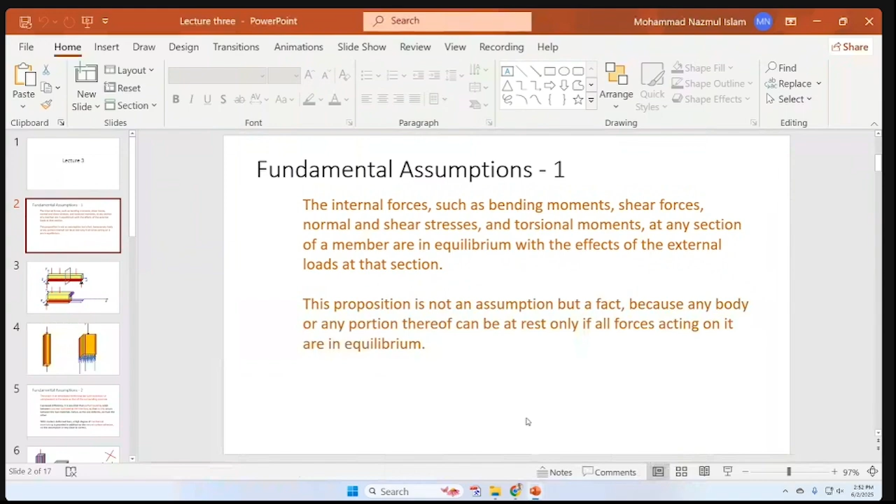Just a second, I think I need to open one more file. I don't find the file, so let's continue with this one. Okay, we have 5 assumptions. I'll spend like 5 to 10 minutes on each of them.

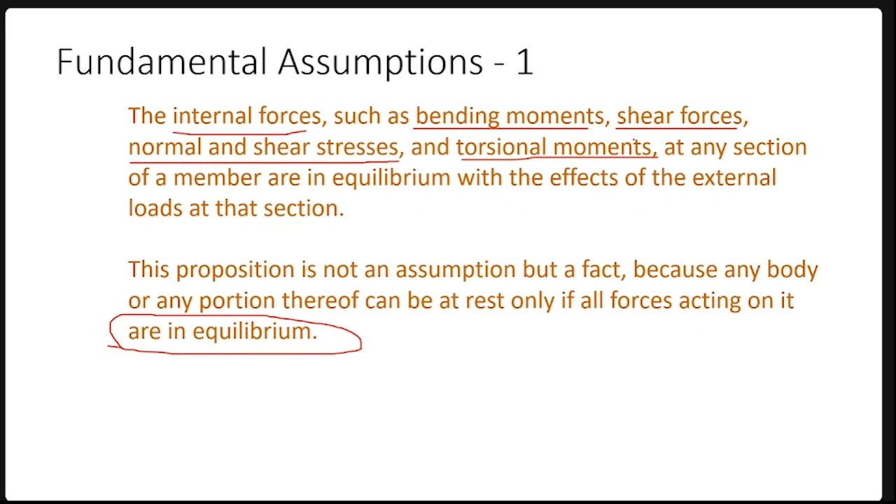So assumption number 1 is about equilibrium. We assume that the internal forces are bending moment, shear force, normal and shear stresses, torsional moments. These things are created at sections. If you cut a reinforced concrete member by taking an imaginary section, you will see the internal forces: bending moment, shear force, stresses, maybe torsional moments, and so on. So those things are in equilibrium with the external loads. Basically, internal forces and external forces make an equilibrium for any part of a reinforced concrete structural member.

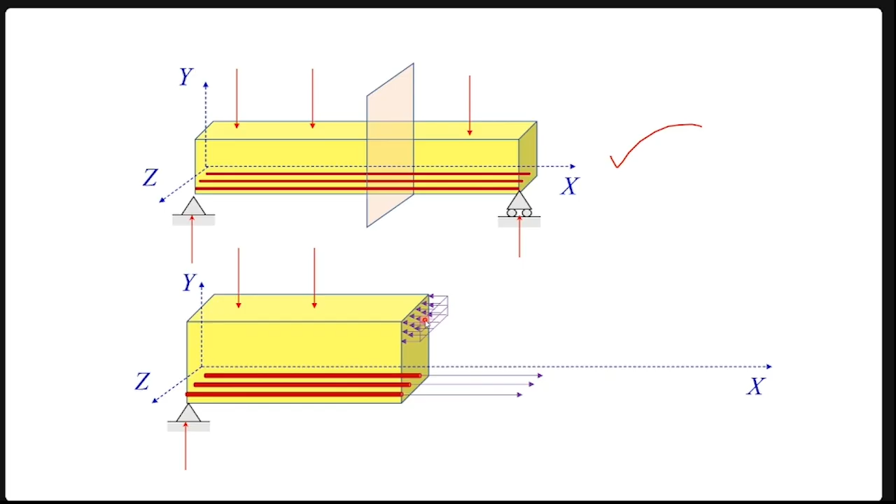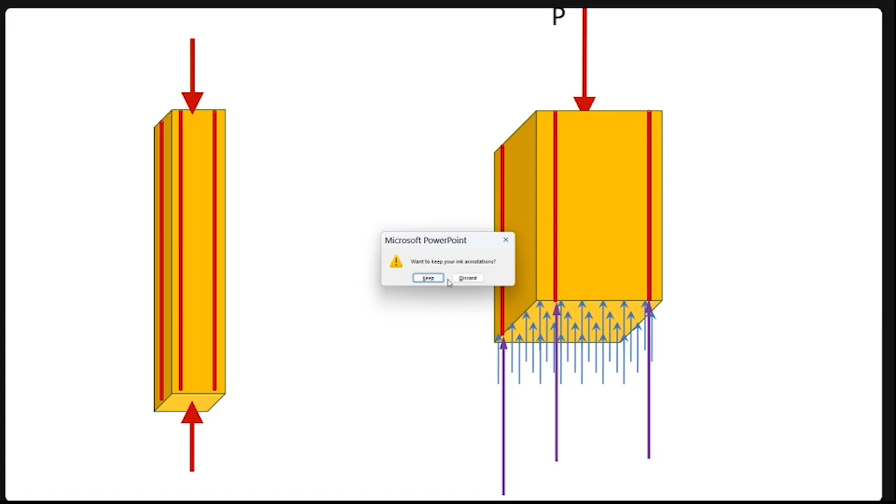So the example you looked at was about a beam. I showed the external forces acting in the beam - the red colored forces - and I also showed the internal stresses for the beam, which are in equilibrium. If you consider a column, for example, we have cut the column somewhere in the middle, and we are looking at the top part of the column. Here the external force is this applied force from the top, and we have internal forces since it has been cut somewhere here.

So say we cut it here into two pieces, and we look at the top part only. This surface is an internal plane surface.

So in this surface, we'll probably have compressive stresses.

Of course, there are two materials here. We need to remember always that reinforced concrete is a composite material. Composite means there are two materials blended here.

One material is inserted into another. It is basically concrete, but we have steel bars inserted into concrete.

So it's a composite, and a composite will behave in different ways than a homogeneous material. Homogeneous material is when there is no inclusion, nothing. It has the same material everywhere in all three dimensions, the same density everywhere, the same unit weight everywhere, the same property everywhere. That sort of material is called a homogeneous material.

But here we are not dealing with a homogeneous material. We have a composite. Composite means we have concrete, but at some locations we have steel bars inside concrete.

So with a composite, some stresses will be in concrete - I put them in blue color - and some stresses will be in steel bars, which I draw in purple color.

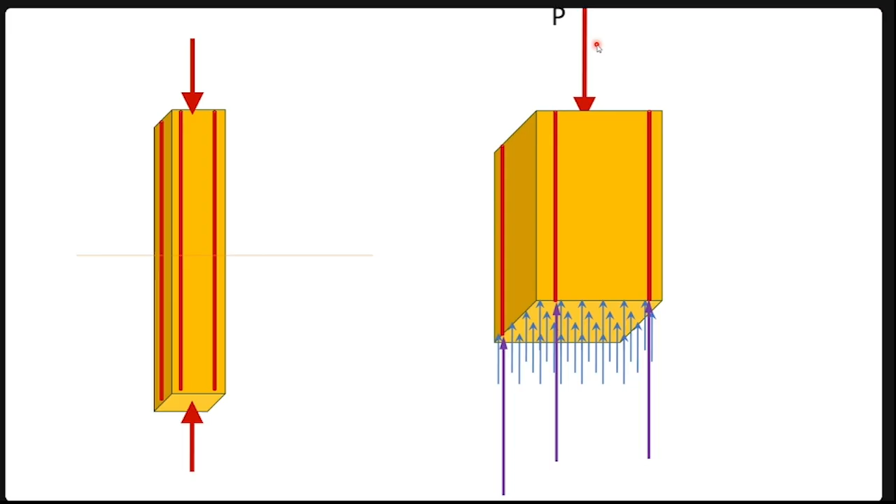So whatever is the structural member, it could be a column or it could be a beam. If you draw all the external forces, and if you assume the internal stresses correctly, the equilibrium will be there between the external forces and the internal stresses.

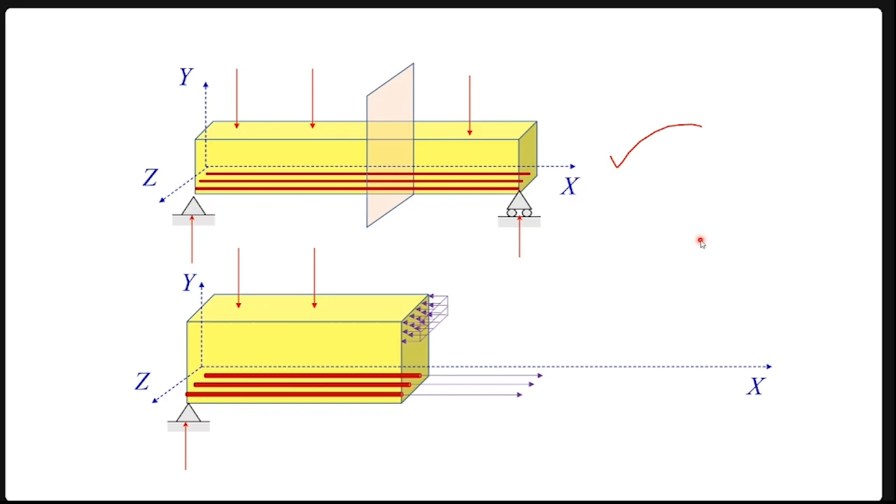That's our fundamental assumption number 1. If you understand this one, I will move on to fundamental assumption number 2.

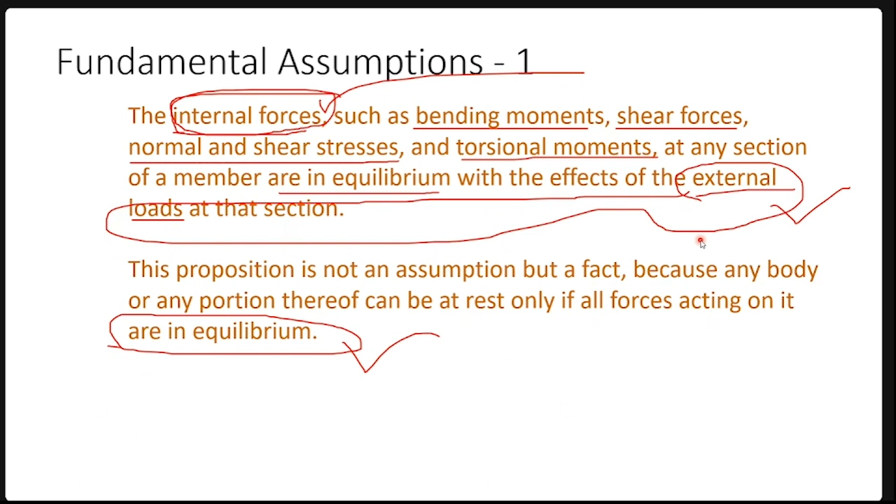Okay, so let us proceed to fundamental assumption number 2. This is about deformation. The first one was about equilibrium. The second one is about deformation.

Deformation means - I think we could have written it in a very simple sentence. Let me go back and write it down in a very simple sentence.

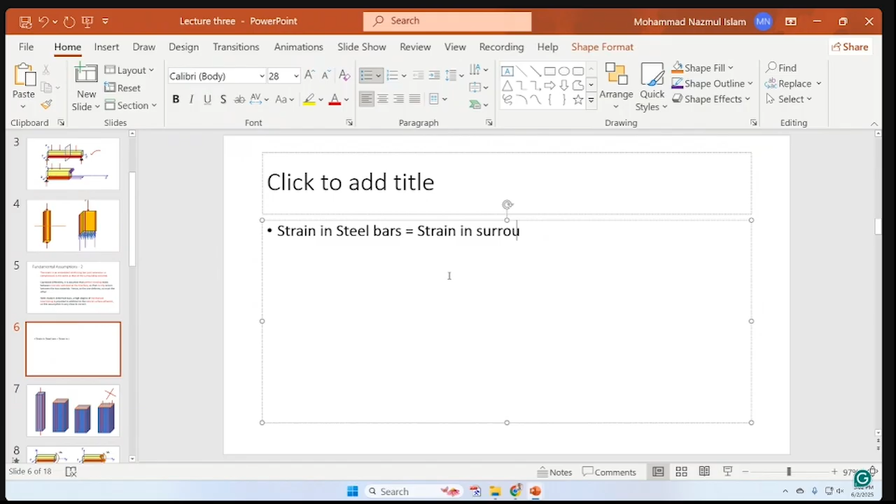It means strain in steel bars is equal to strain in surrounding concrete. So basically, strain in steel equals strain in concrete.

It's a very simple concept, but this concept has the most profound implications in our reinforced concrete behavior and design.

We assume, and this is reality - we assume that strain in steel bars, or strain in steel, is equal to strain in surrounding concrete.

So let me give you a few illustrations by figures first, then I'll come back to the statement one more time. So look at this column carefully.

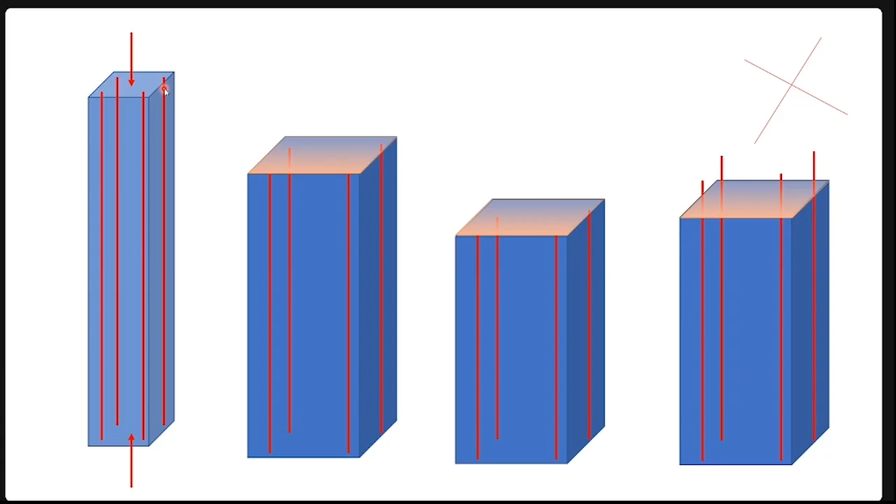To the leftmost, we have a column that has 4 reinforcing bars inside it. In its interior, there are 4 bars. So the column is acted on by a compressive force. So what we expect is...

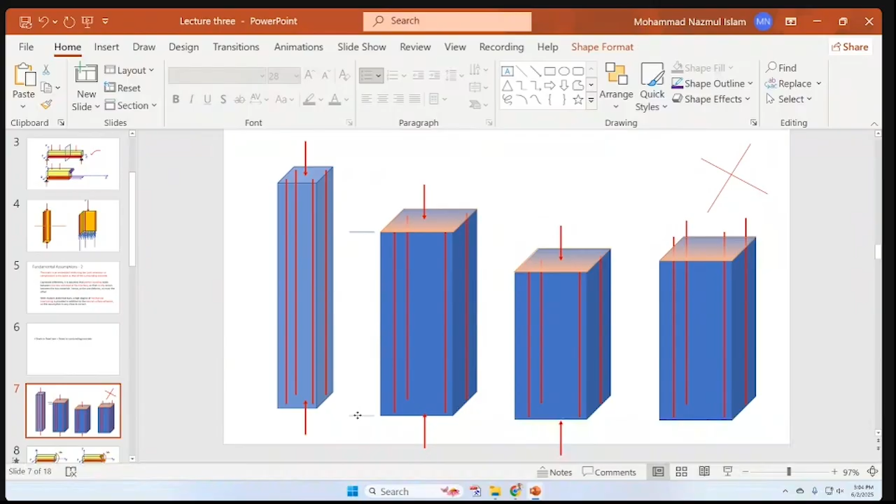due to the application of the compressive force, the column will elastically deform. Basically what we assume is, if the length of the column before deformation was L - so let us consider that the length of the column before deformation was L.

So after deformation, since it is under compression, under compressive force, the length of the column will be a little bit smaller. Let us consider this smaller length to be L minus delta.

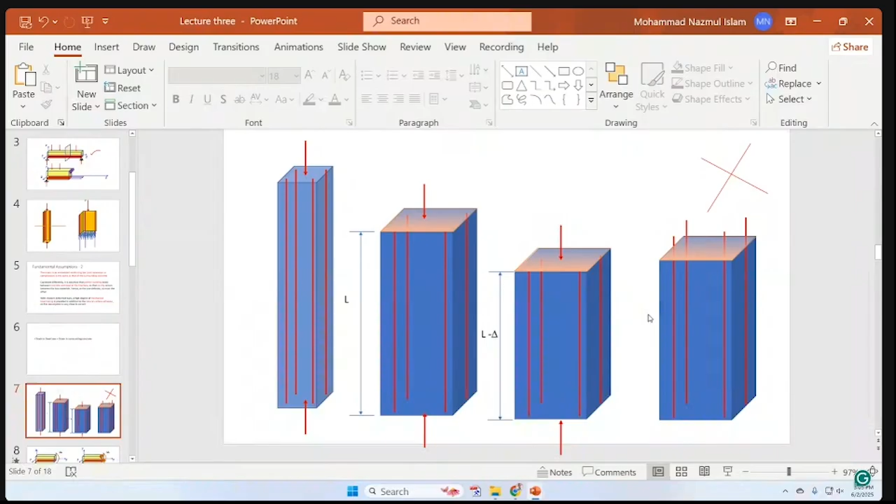Now look at the third figure. Before deformation, the length of the column was L, and after deformation, the length of the column is L minus delta. Delta is its elastic shortening.

Elastically, there will be shortening. These sorts of shortenings are very small, maybe 1 or 2 millimeters, but it is there - 1, 2, 3 millimeters based on the magnitude of the applied load.

So what we assume here is that the shortening, the amount of shortening delta, is equal for concrete and steel. So if concrete is shortened by an amount delta, all steel bars also have been shortened by the same amount of delta.

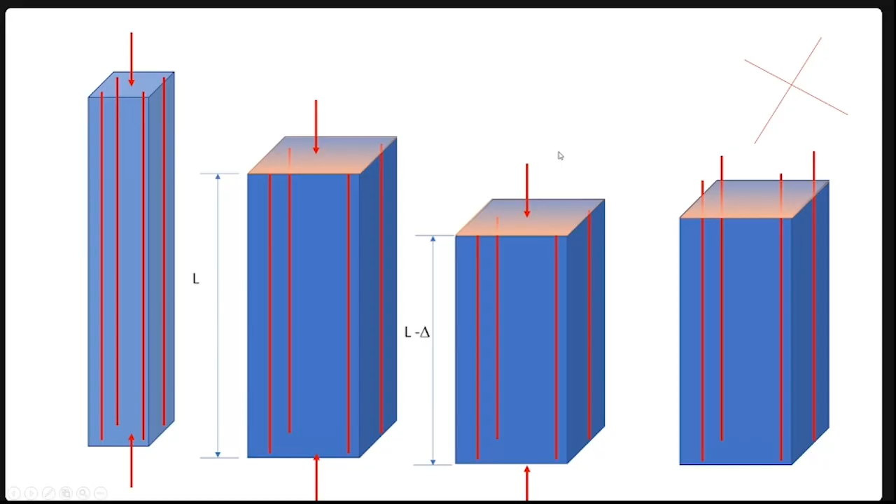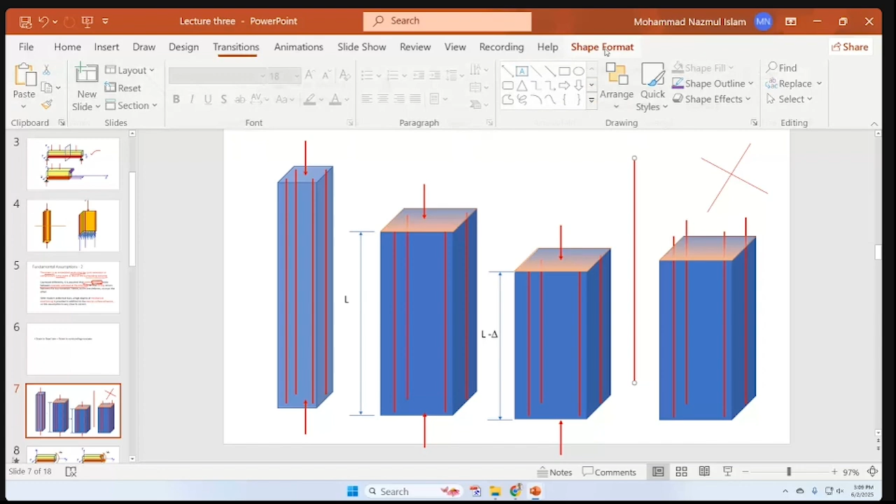This is basically a frictional force that exists between concrete and steel at the interface. Interface means, let me draw it for you. What does interface mean? Let me make it thicker. So there will be a bond force.

If there is a tendency of deformation, this sort of friction between steel and concrete is generated, and that friction stops any sort of relative movement between concrete and steel. So this strong bond stress is basically friction created on the outer surface of the cylindrical shape of the steel bars.

This kind of friction is created on the surrounding cylindrical surface of the steel bar. That friction stops any sort of relative movement between steel and concrete. This relative movement, in our engineering terminology, is called slip.

So if there is a slip, meaning if there is a relative movement - for example, in the fourth figure, which has been crossed out by me, there was a slip. To properly understand this fourth figure, you should consider something. Hypothetically, imagine here there are 4 steel bars embedded in a foam-like material, like the foam in a sofa set - imagine a column of foam with 4 steel bars embedded inside it.

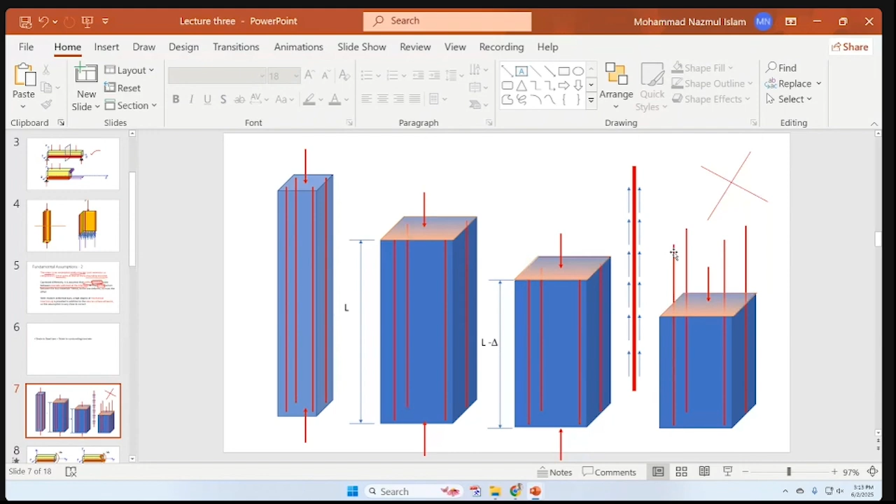Concrete and steel deform equally. There is no relative movement between steel and concrete - that relative movement we call slip, S-L-I-P. So there is no slip between steel and concrete. As one deforms, so must the other. If concrete deforms, steel also deforms; if steel deforms, concrete also deforms. They cannot deform separately, they deform together - they elongate together, they contract together.

So extension or compression, elongation or contraction, happens together. There is no relative movement between steel and concrete.

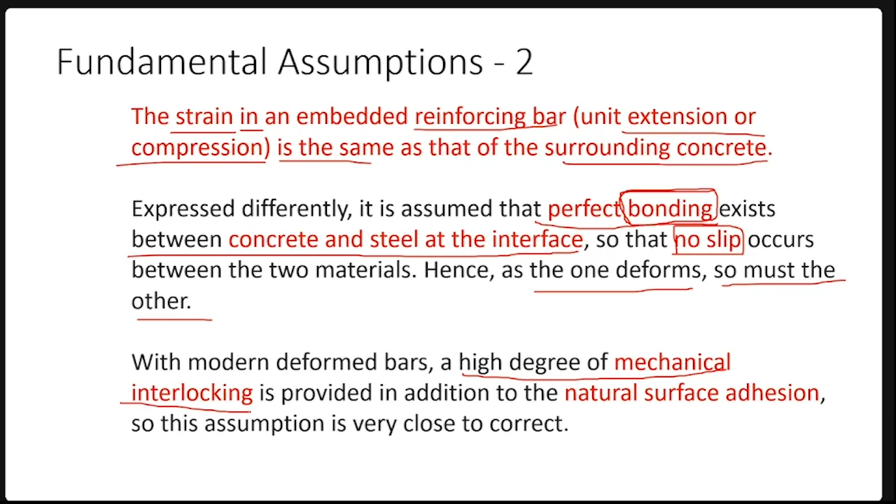This is maintained by a high degree of mechanical interlocking, because the bar surfaces are ribbed - deformed surfaces, we call them deformed bars. Their deformed ribs are interlocked with the aggregates of concrete, and they don't allow any relative movement, in addition to the natural adhesion between cement and steel. So this is very close to the correct situation.

So for a column, we assume it this way: the fourth thing doesn't happen. The third thing happens - concrete and steel have equal shortening or equal elongation.

If you consider a beam under bending moment, this is what we assume to take place in a beam. When you take a cross section, consider that this is the cross-sectional left part of a beam, created by taking a section somewhere here. So this plane surface is an internal plane, and there is a bending moment. Maybe there is a shear force and axial force, but we are not considering them right now - we are considering only the bending moment.

By the way, are you listening? Yes sir, yes sir, yes sir. Very good. We have 53 or 54 students at this moment.

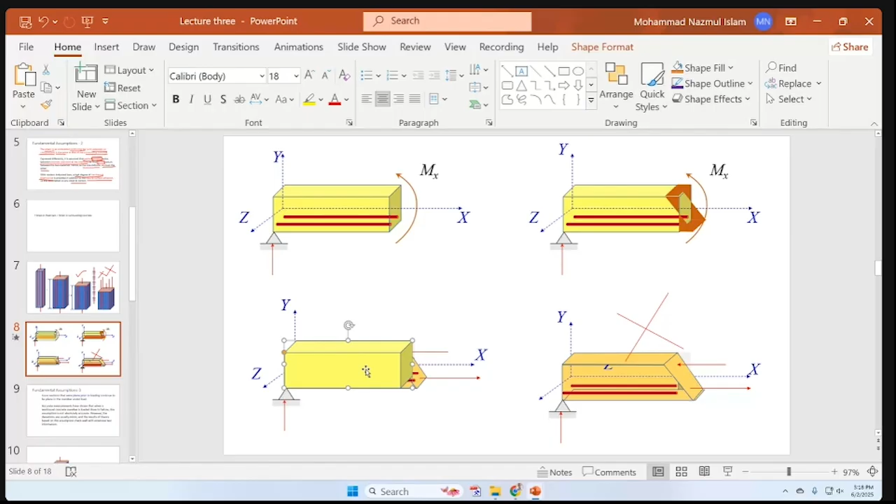The vertical surface was the situation before the bending moment was applied, and after the bending moment is applied, the vertical surface has been rotated and gone to this inclined surface. So if the surface is rotated, you should understand that the top portion, from this 0 point upward, this whole top portion of the beam is acted by compressive strains, and the bottom portion is acted by tensile strains.

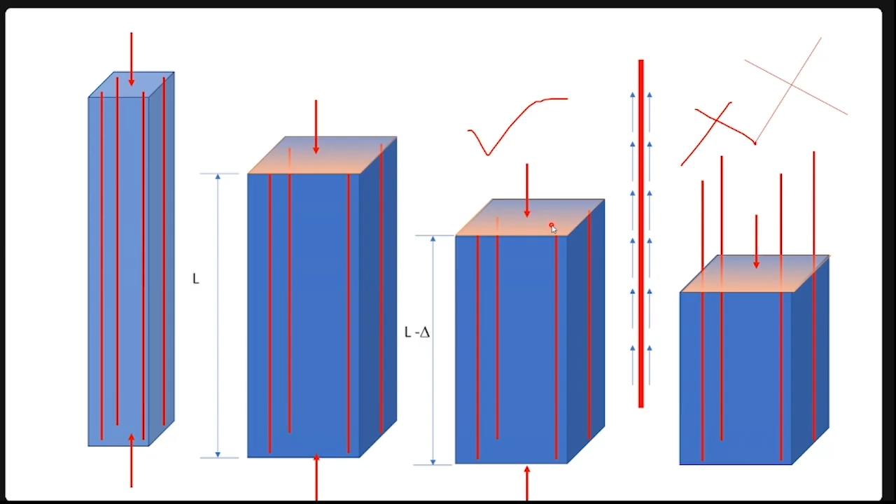And the fourth scenario doesn't happen - where concrete shortens a lot but steel bars don't shorten, or shorten less, causing unequal shortening. That doesn't happen. The deformation will be equal between concrete and steel. This happens for compression, and it also happens for tension when concrete is acted on by bending moment. So due to bending moment, when a vertical cross-sectional surface undergoes rotation like this, some portions of the concrete are compressed due to compression, and some portions of the concrete are elongated due to tension.

We are focusing on the tension zone only. In the tension zone, concrete is elongated, so it must take the steel bars with it. Steel bars will also elongate by the same amount. So this fourth figure doesn't happen, where concrete has elongated but steel bars maintain the same length. The amount of elongation in concrete and in the steel bars at the same location will remain the same. That is what we mean that strain in steel bars equals the strain of its surrounding concrete. So that's our assumption number 2.

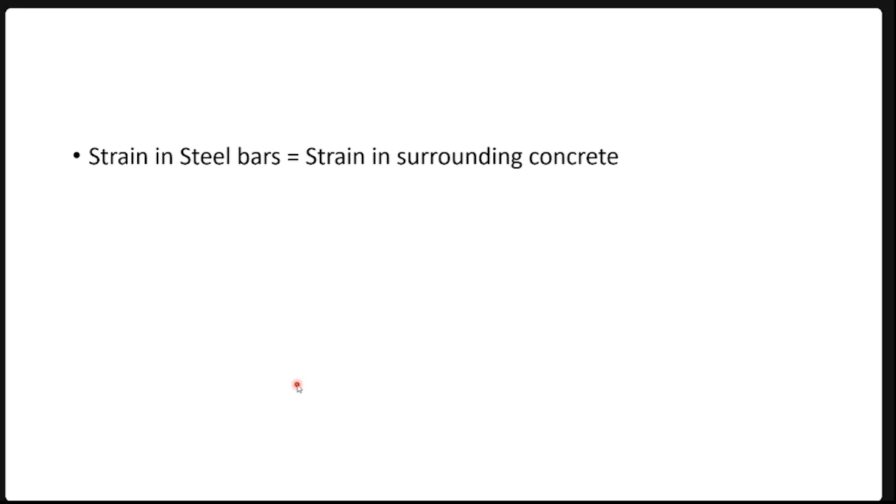You try to understand it.

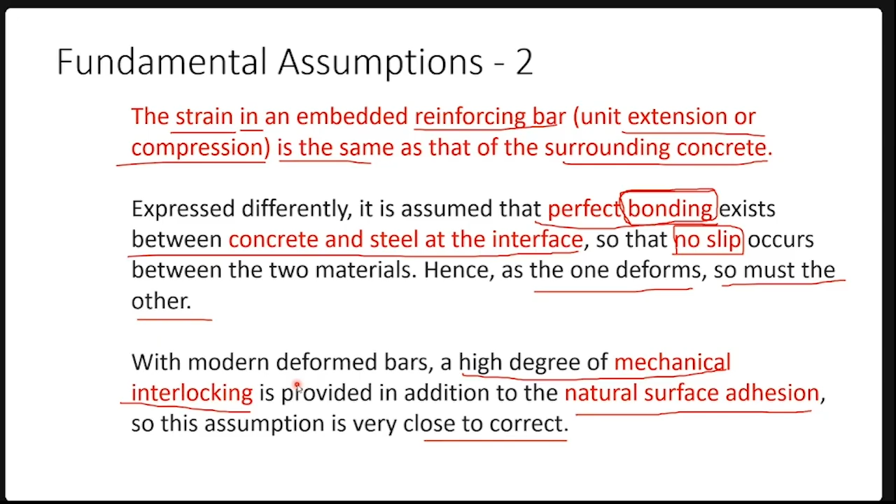Now we'll move on to assumption number 3. Assumption number 3 is something that we already have gone through.

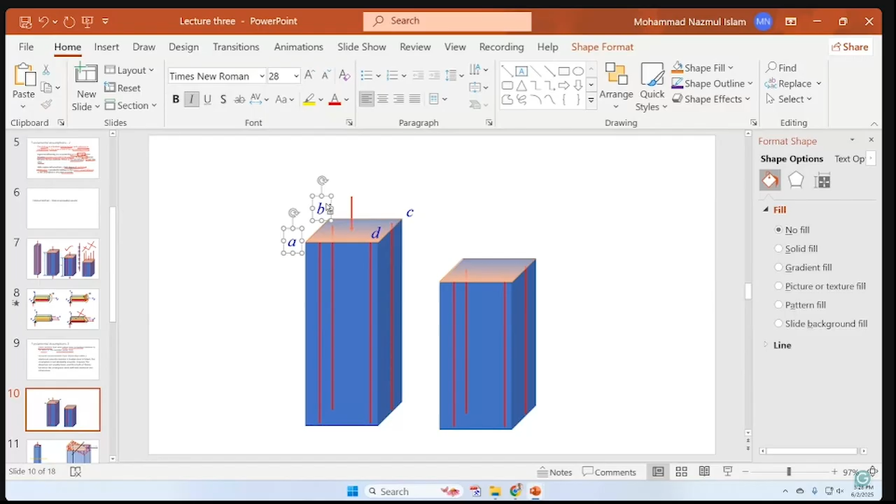So we are focusing on the cross-sectional surface ABCD at this moment. After deformation, the surface ABCD goes to a new location, the whole thing compresses, but it remains a plane surface. It remains a rectangle. The surface doesn't change.

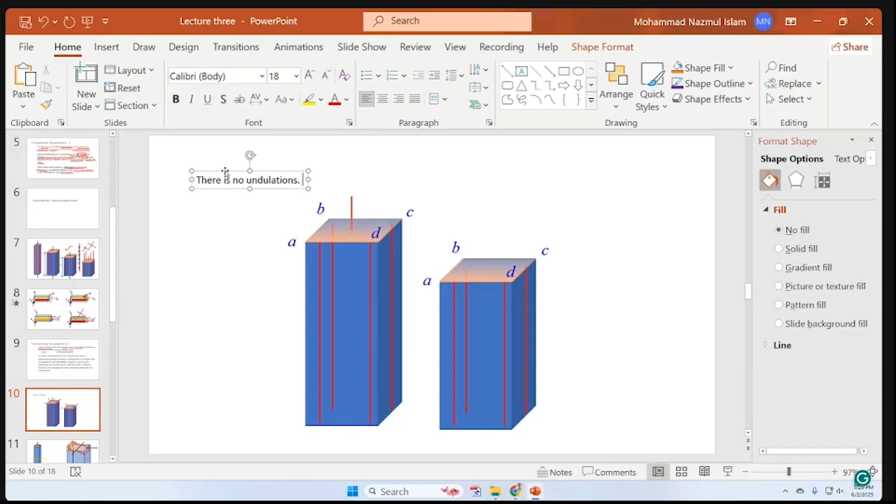Their surface remaining plane also means there is no undulation. No undulation means no warping.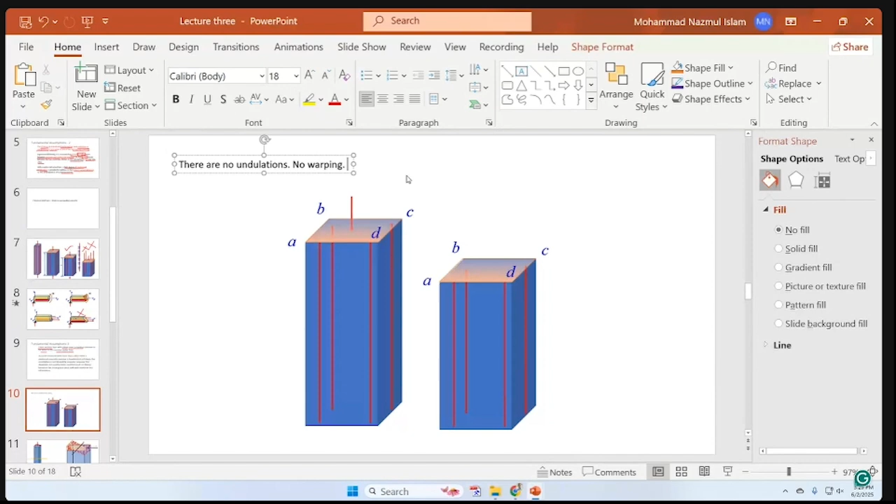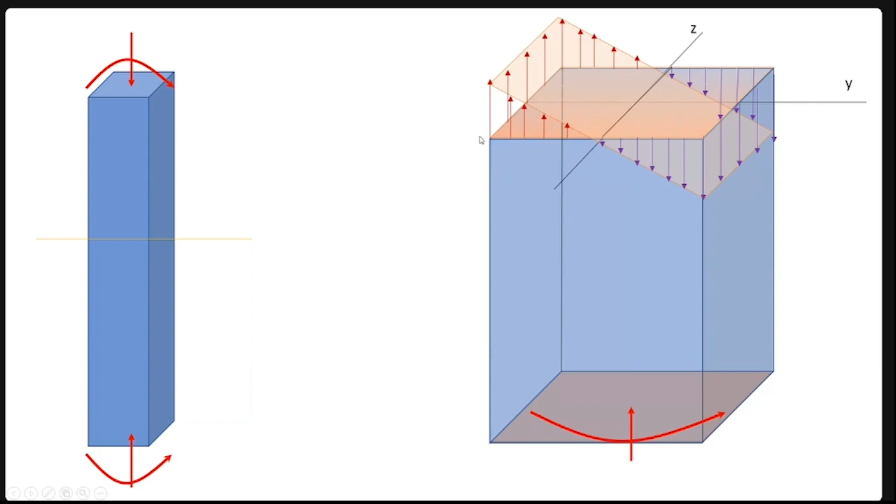So this happens to column, it also happens to beam. Even if you apply a bending moment to a column, in the last figure we applied only a concentrated force. If you apply a bending moment, the surface ABCD undergoes a rotation.

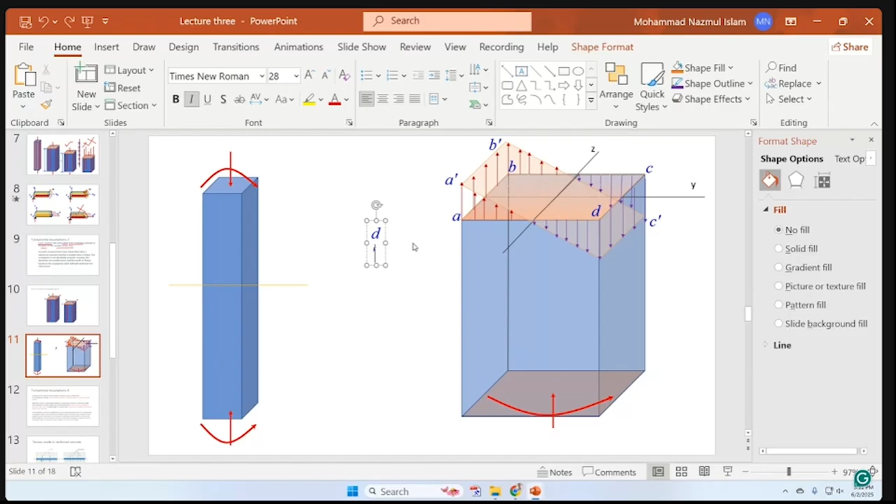But again, this inclined surface is also a plane surface. Again, there will be no undulations, no warping, no aperture.

Although this is not absolutely correct, there are some sort of warpings and some apertures, but we ignore them when we design reinforced concrete structures. When the rectangle ABCD undergoes a rotation and goes to a new orientation,

A prime, B prime, C prime, D prime.

And you understand, as I told before, that... I'm just on the phone for a moment.

So what I was saying is that this assumption is not 100% correct. If you measure accurately, studies have shown that when a reinforced concrete member is loaded close to failure, this assumption is not absolutely accurate.

However, the deviations are usually minor, and the results of theory based on these assumptions check well with extensive test information.

I want to emphasize this particular term, test. We need to understand that concrete more or less does not follow any mathematical formula. Most of the time, concrete does not follow any mathematical formula. So to understand concrete's real behavior properly, we need to go to the laboratory and do some tests.

So we have found that very close to failure, this assumption is not 100% correct, but the deviations are minor.

And the results check well with the extensive test results.

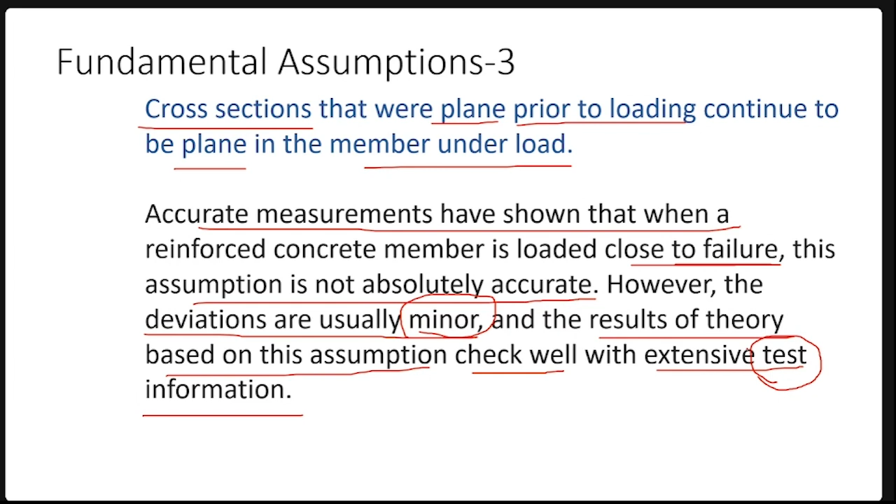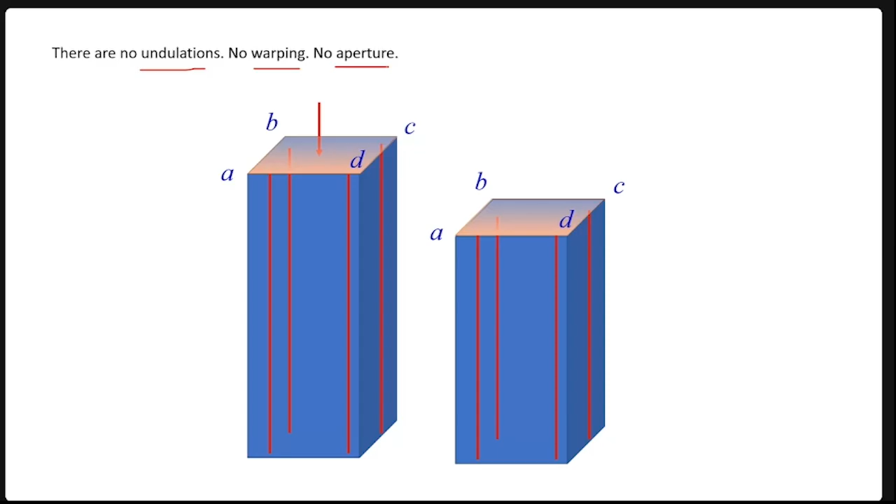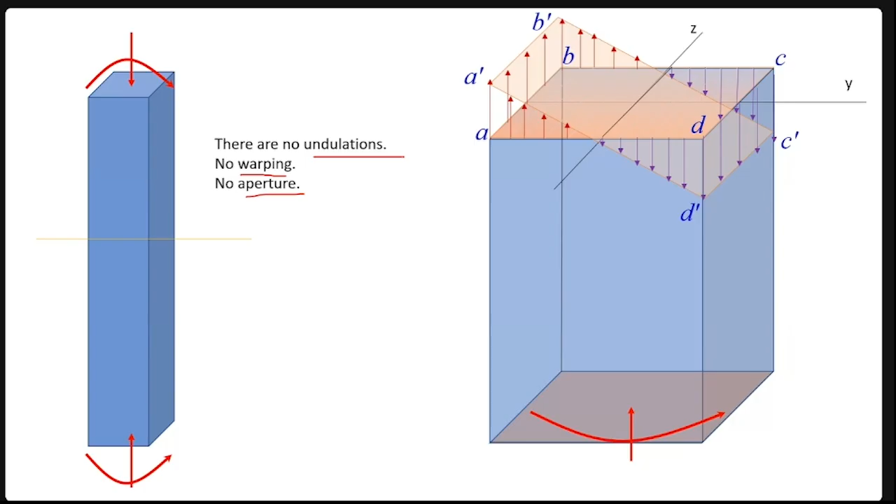What we are assuming here is that all the cross sections, for example for the column, we have a rectangular cross section ABCD. It is compressed, but ABCD remains ABCD. There is no undulation, no warping, no aperture. It remains absolutely plane. Similarly, when a column or beam undergoes a rotation due to bending moment, the cross-sectional surface ABCD rotates to a new orientation, A prime, B prime, C prime, D prime, but the surface still remains a rectangle, although inclined. It is plane, with no warping, no aperture, no undulation. It is absolutely plane. This is our assumption number 3.

Now assumption number 4. This is pretty simple, although I wrote a lot of information here, but the assumption itself is simple. As you understand from the beam behavior, let me go back and show the beam behavior here.

So when a beam is acted on by a bending moment, the cross section undergoes a rotation. Whether it's a beam or a column, the cross section will rotate. So when it rotates, you understand that some part of the beam is being pushed inward.

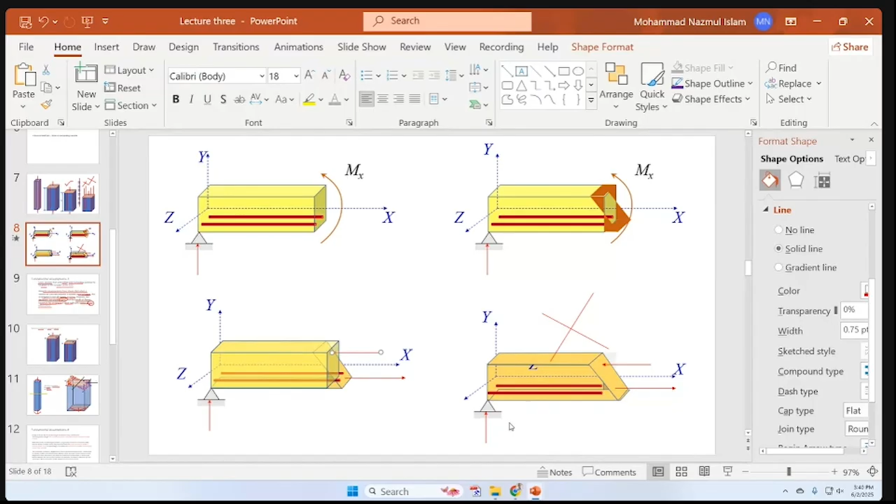I showed a force here. Some part of the beam is pushed inward, and when someone pushes a material inward, we call it compression. So some portions of the beam are under compression, and some other portions are being pushed outward, which creates tension. There are two forces, compression and tension, acting in parallel toward opposite directions. They create a couple, and the couple moment is equal to the applied bending moment Mx.

That is one side of the discussion. Here we are concentrating again on the tension zone. We need to understand that concrete is very strong in compression. In the compression zone, whatever the force is, concrete can take a very large value of force. Concrete is strong in compression. It doesn't break down, collapse, fail, or crush easily under compression. But when you apply a tension force to concrete, you need to understand that concrete is weak in tension.

So when you apply a tension force, concrete cannot take that much tension. Concrete fails under a very small amount of tension force. When it fails under a very small amount of tension force, we see this sort of cracks. This crack is visible, right? Crack, crack, crack, all crack. So these cracks are numerous, like so many cracks.

So concrete on the tension side is always cracked. Usually these cracks are very small in size. We call them micro cracks or hairline cracks. Hair means hair, hairline cracks, cracks as thin as a hair's line. But these cracks are everywhere. All the concrete structures you use, your concrete buildings, bridges, flyovers, elevated expressways, whatever, all concrete structures are cracked.

So cracks are everywhere. Concrete is designed to crack. We expect cracks in concrete. If concrete is not cracked, it is not a good design. So we will assume that concrete on the tension side is always cracked.

So here we wrote that the tensile strength of concrete is only a small fraction of the compressive strength. So concrete in that part, meaning the tension part of a member, is usually cracked. Basically the tension zone is cracked. In well-designed members, these cracks are generally so narrow as to be hardly visible, so we don't see them because of painting and everything. They are hairline cracks, very narrow in dimensions.

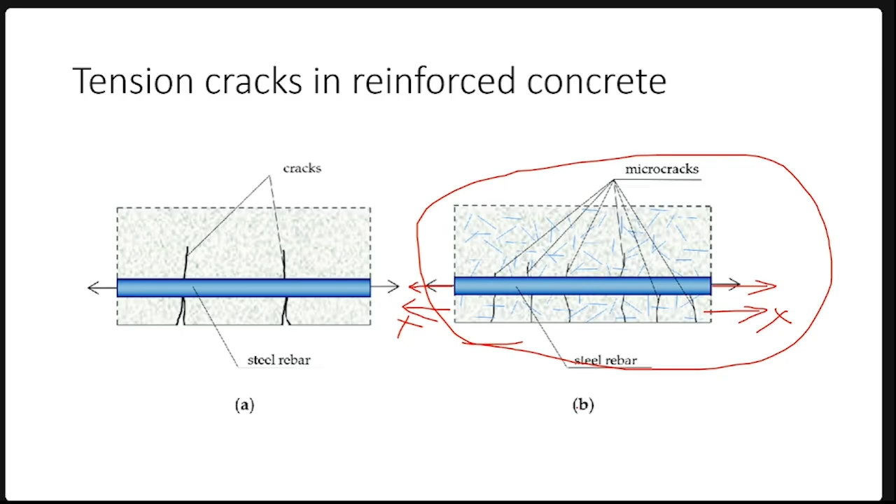So if there are cracks, we need to understand that if concrete is cracked everywhere, concrete basically is not carrying any tension force. All the tension force is being carried by steel bars. So concrete does not carry any tension force when it is cracked; all tension forces are carried by steel bars. So when we design a reinforced concrete member, we design the tension zone to be resisted by steel bars only. Concrete does not resist any tension force. This is our assumption number 4.

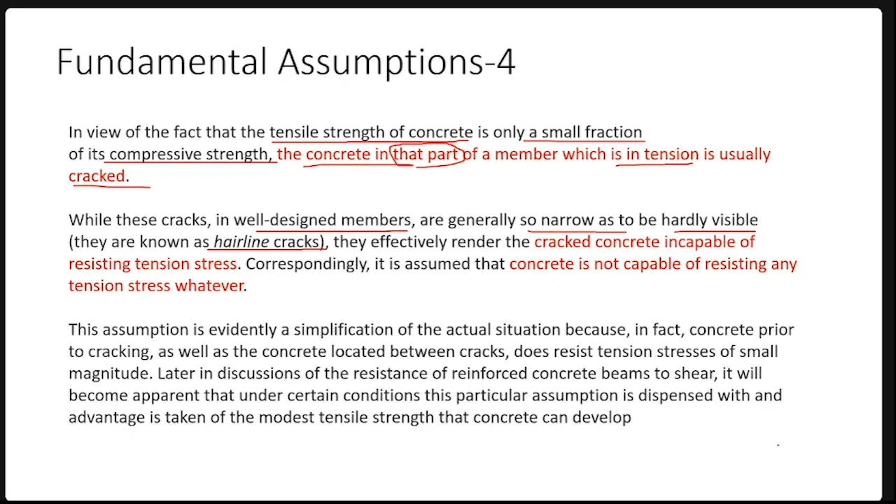Now the final assumption. The final assumption is simple: the theory is based on the actual stress-strain relationships and strength properties of the two constituent materials.

So when we shall design, we shall start design from the next class. By the way, do we have a class on Wednesday? Yes, sir, yes sir. Wednesday class is very important. I will explain all the fundamental things.

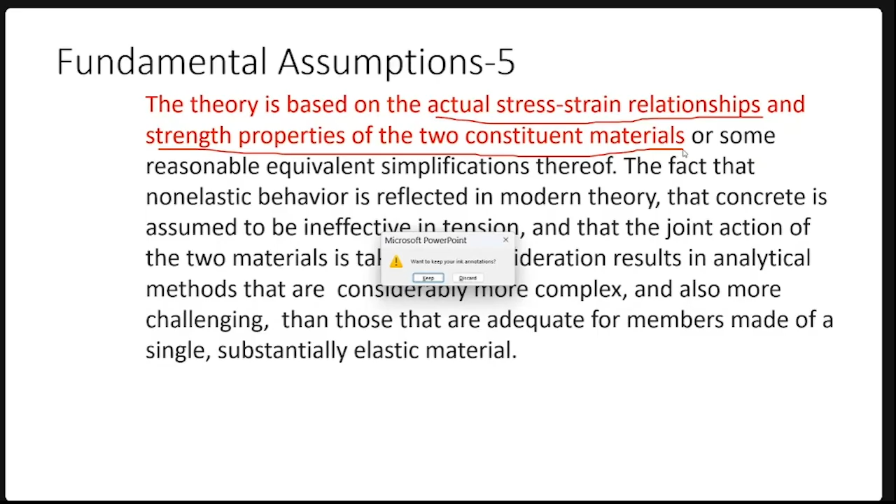So fundamental assumption number 5: there are two materials here, one is concrete, one is steel. We know that the stress strain diagram of steel is like this. It starts at some point, and up to some point, steel follows Hooke's law, stress and strain are proportional. Steel is also elastic. Then it yields, and this yield plateau is quite long. Then it goes to strain hardening.

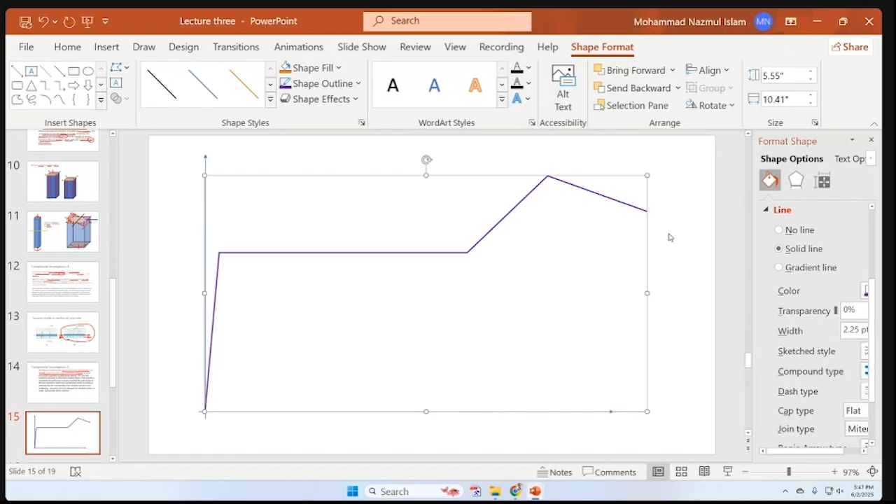So basically, this is the stress strain relation for steel. By the way, the strain hardening portion is curved, not a straight line like the one I drew. This portion is curved. So although it's a composite material, we will still consider this traditional stress strain diagram for steel, and we will also consider the traditional stress strain diagram for concrete.

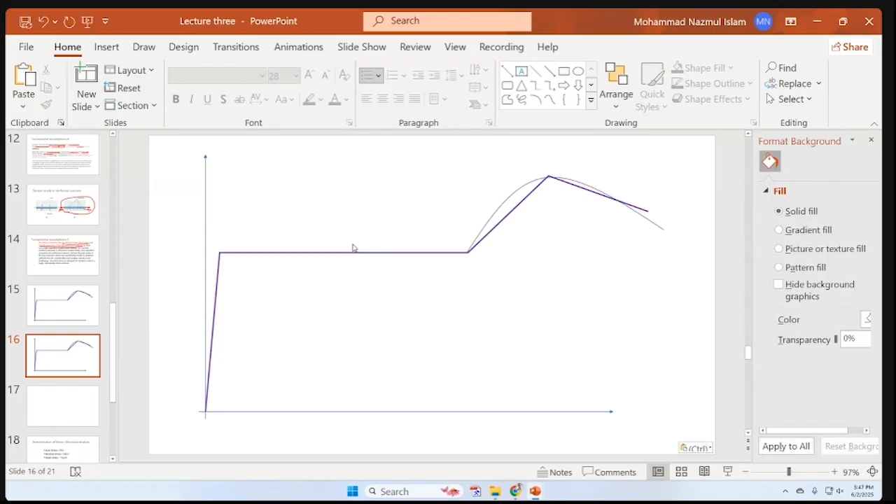So before you come to the next class, I want you to learn the stress strain behavior of steel and concrete properly.

Concrete behaves this way, steel behaves that way. We shall follow this stress strain diagram for steel and this stress strain diagram for concrete. We are not going to develop some new diagrams. And the definition of stresses will remain the same. For example, in your solid mechanics class, you learned axial stress, bending stress, and shear stress. We will be using these formulas again. We are not going to develop some new formulas.

So that's the basic concepts of today's class. If you have any question, I will answer that. But you start thinking what could be your question. In the meantime, I will take the attendance.

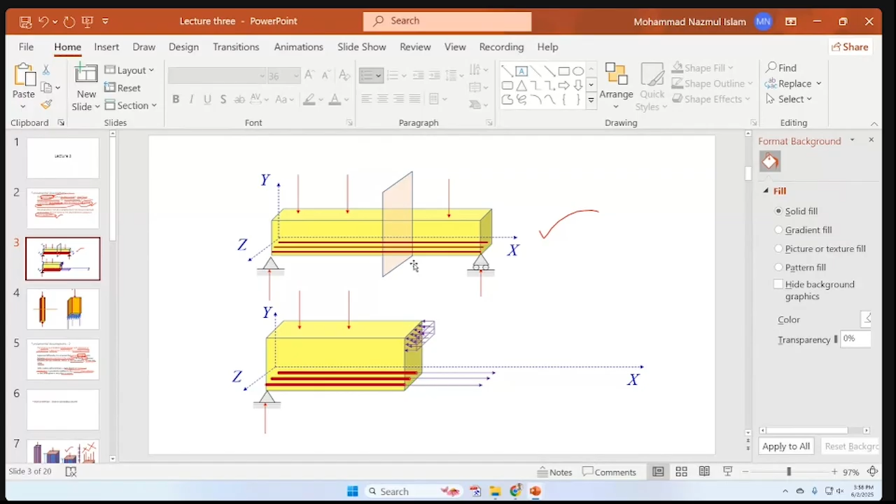We have assumption 1, which is equilibrium: external and internal forces are balanced and in equilibrium. Assumption 2 is that strain in steel equals strain in concrete, so there is no slip. Deformation in concrete equals deformation in steel.

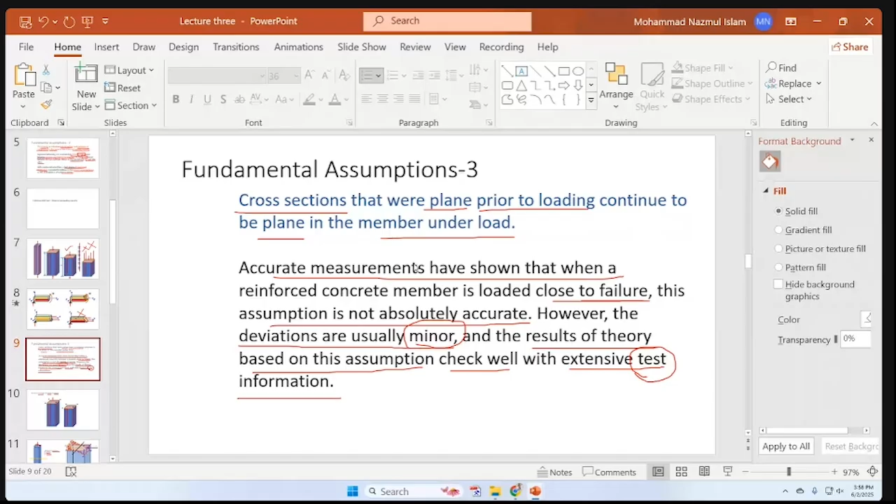Assumption 3 is that cross sections remain plane. ABCD remains ABCD, there is no warping. The cross section does not change, though it may be inclined due to moment, but it remains a plane. A plane surface remains a plane surface.

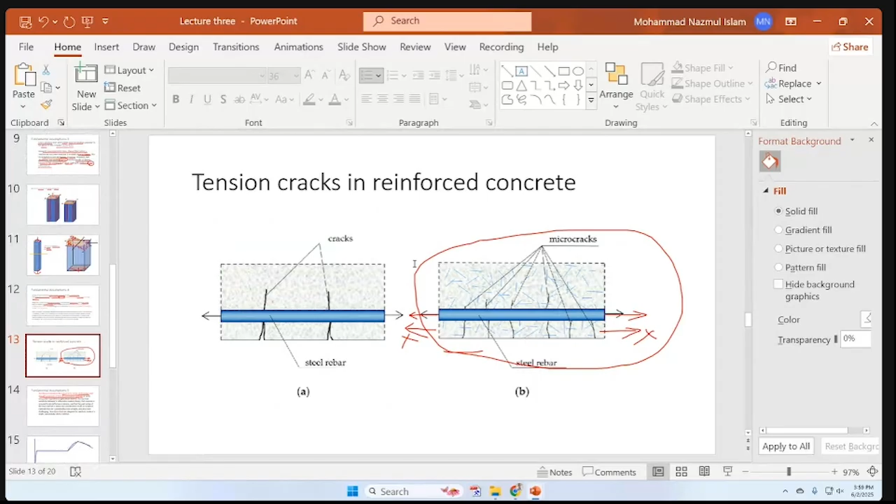Assumption 4 is that concrete is cracked in the tension zone. Assumption 5 is that we will use the stress-strain relationship of the constituent materials, steel and concrete. Then in our next class, when we go to design problems, we shall calculate stresses based on these formulas.

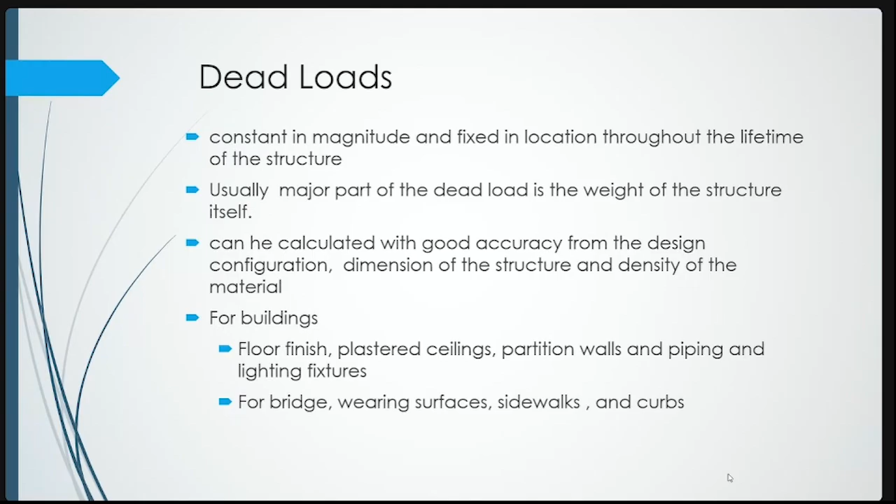Okay, so this was our lecture 3, but we left something in lecture 2 that I couldn't finish in time. A part of lecture 2 still remains. If you remember, in lecture 2 we talked about loads: dead load, live load, environmental load, wind, earthquake. I think I didn't discuss this part.

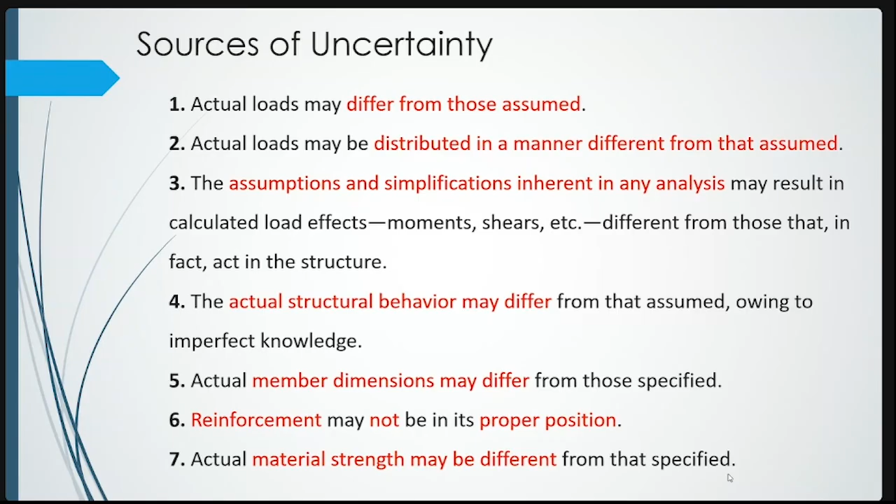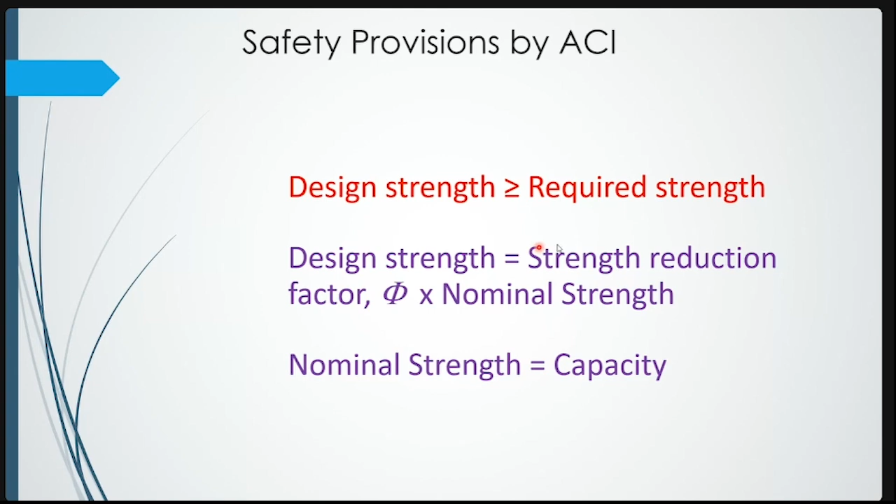We use some sort of safety provision. The safety provision is: design strength should be equal to nominal strength multiplied by the strength reduction factor. This is what we discussed in our last class.

At one set of calculations, we draw the structure's geometry, basically modeling it in software. Then we apply loads in their load combinations. There are 8 combinations, so we combine the loads in various ways: dead load, live load, dead load, live load.

Roof live load, snow load or rainwater load, dead load, roof live load. LR means roof live load, S for snow which we don't have in Bangladesh, R for rainwater which we do have, then live load or wind load, W for wind. This S is for snow load, and seismic is E for earthquake.

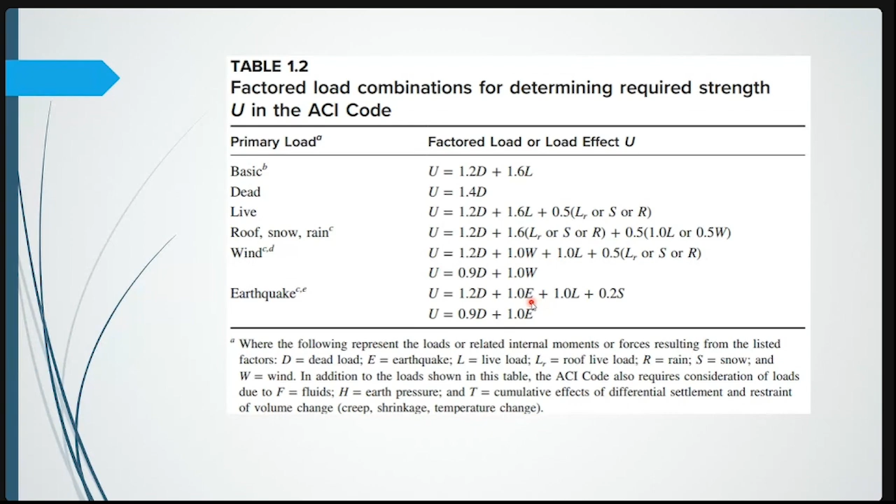So we apply loads in all 8 combinations. Every time you draw the bending moment diagram for a member, you need to draw 8 bending moment diagrams for the 8 different loads. Every load is a combination of dead, live, wind, earthquake, snow, rain, and so on.

So you analyze the structure for all load combinations, then determine the axial force and shear force. Basically, you draw the SFD and BMD diagrams. From these diagrams, you take the maximum. So you have 8 sets of diagrams, and you consider the maximum from all 8 combined.

Then you determine what is called the required strength: Pu, Vu, Mu, meaning required axial force, required shear force, required bending moment. Okay, this is what we shall not do in our course.

We will not do this work here; we will do it in CE 330L or 335L perhaps. What we will do is this: in this course, we will determine or select a cross-sectional size and reinforcements.

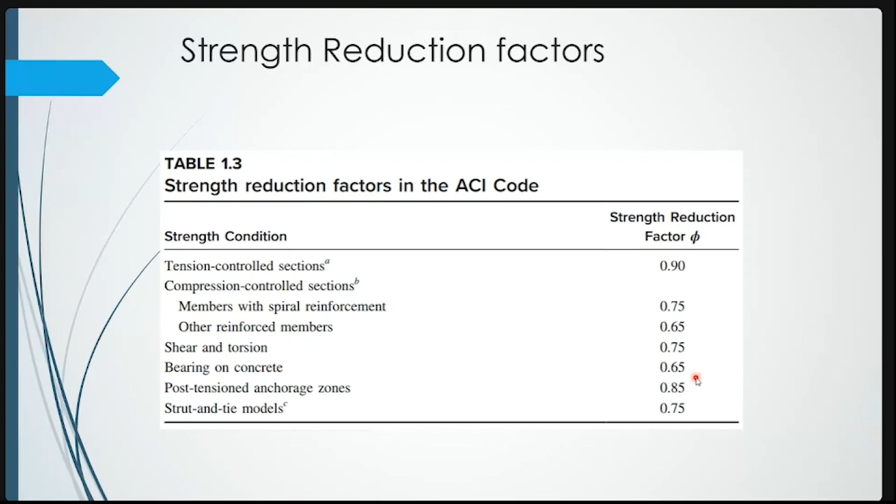Okay, but if you maintain these criteria, your member is structurally safe. But besides safety there's another issue, and that issue is serviceability.

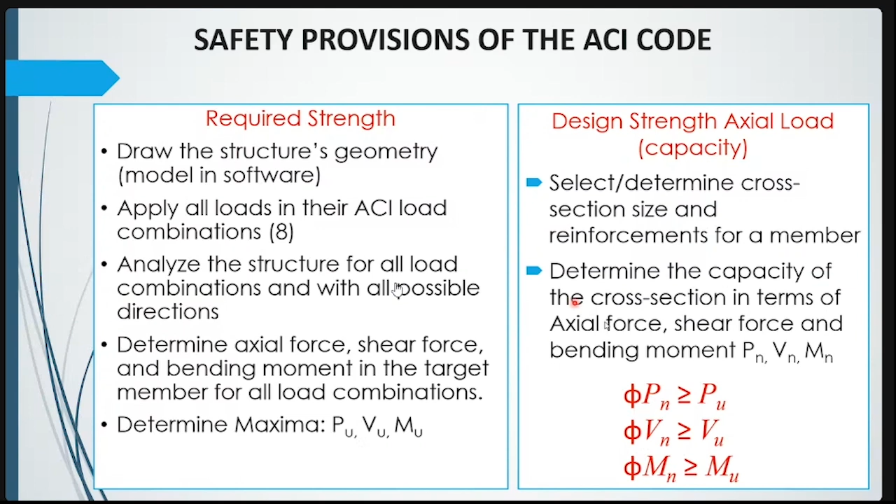So in addition to axial force, shear force, and bending moment, we need to consider deflections.

Deflections should be small. Think about a building you stay in, but when you enter a room, that room undergoes deflection. Think about a bridge - when you pass over it by vehicle, the bridge either deflects or vibrates. It does not give you a good feeling.

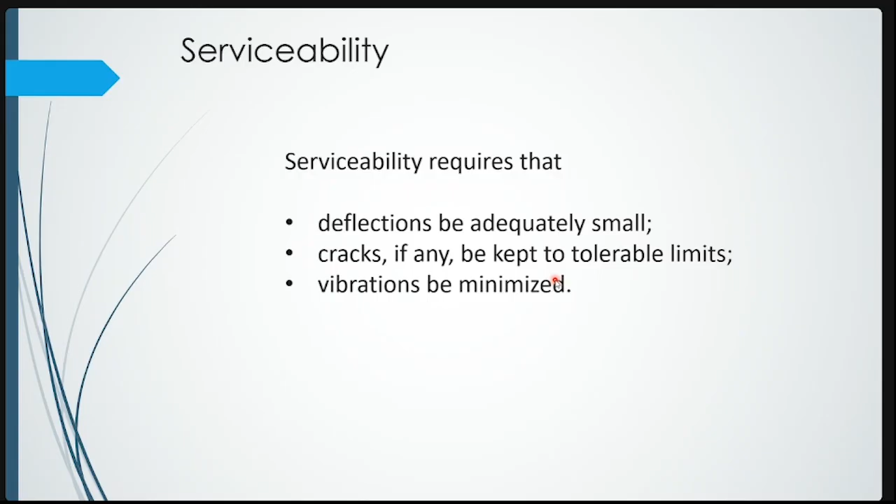So what we do, as I mentioned earlier, to calculate the required strength, we model the structure in a software - a standard software. We model the whole thing, then we analyze it, we apply loads in all their combinations. When you analyze it, it analyzes the structure for all loads - load combination 1, load combination 2, load combination 3.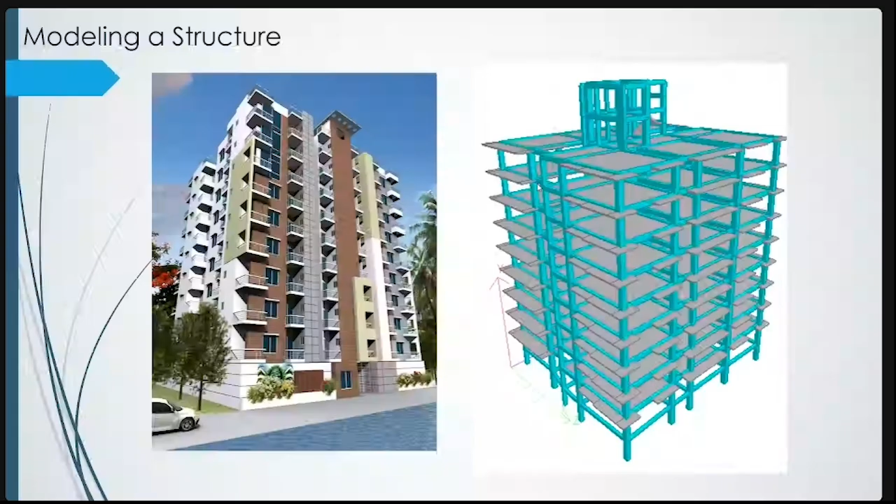Then in another set of calculations, which is usually hand calculation - in this class, everything we do will be hand calculation. We shall not do any computer analysis here, but for hand calculation we usually use some sort of codes. Whatever code you prefer - you can use MATLAB, Mathematica, C++, even Microsoft Excel - you can use any code for your own hand calculations.

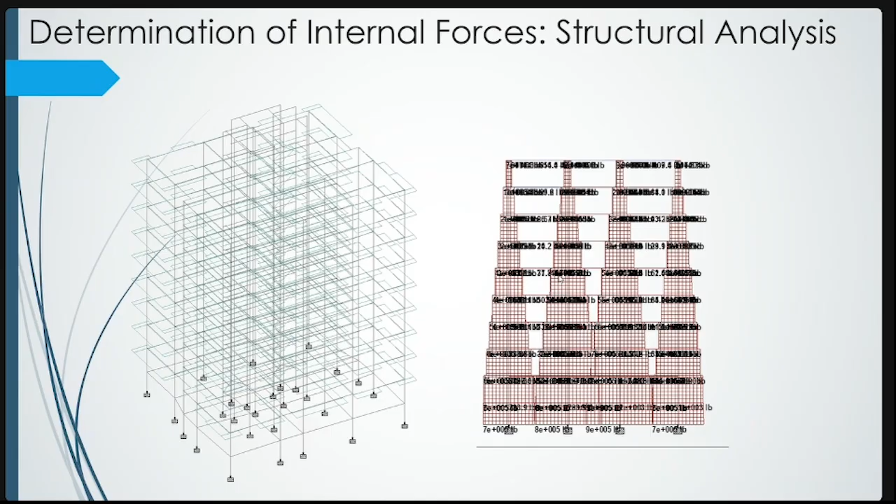We do the analysis using software, and we do the design using hand calculation or code. In our next class, we shall start our design. I think that's it for today. So I'll see you in next class.